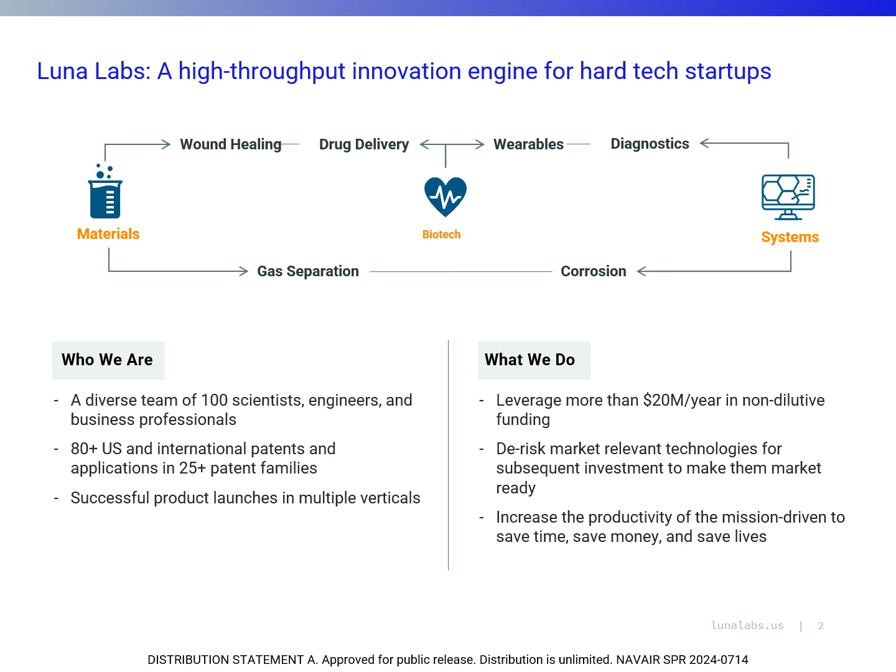Headquartered in Virginia, Luna Labs is a product development company working with industry and key government agencies to solve critical problems. With small business agility and large business capabilities, the company accelerates transformative solutions from concept to product launch for defense and healthcare markets.

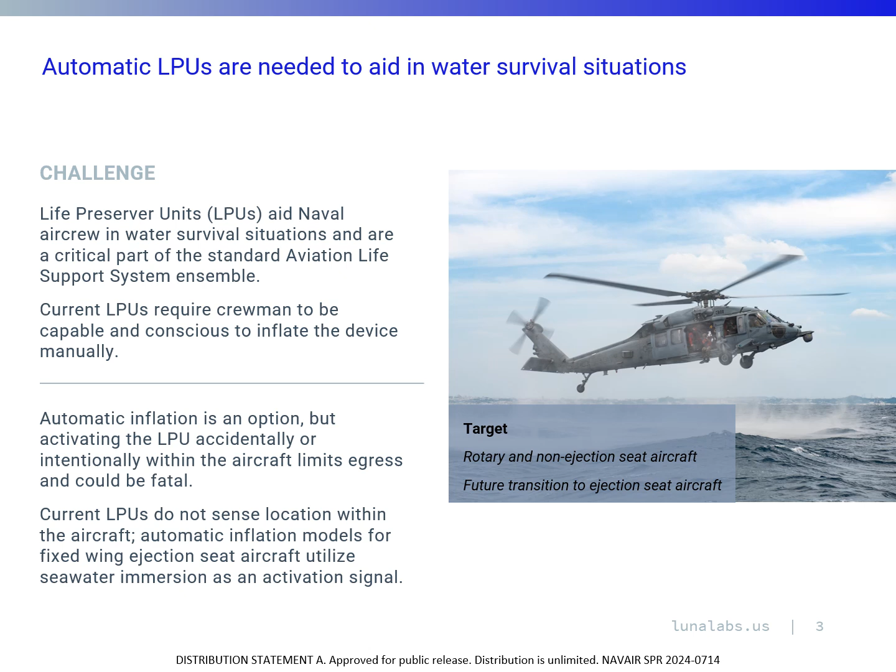Life Preserver Units, or LPUs, are critical life-saving equipment for all military personnel working near or above open water. Current LPUs typically require manual inflation by a capable and conscious crewman. Automatic inflation does exist for other applications, but for the rotary and non-ejection seat aviator, automatic inflation poses significant additional risk. This is because inflation of an LPU while a crewman is still in the aircraft would make it extremely difficult to egress. Current automatic LPUs do not consider egress status or crewman position, and are therefore not sufficient for rotary and non-ejection seat environments.

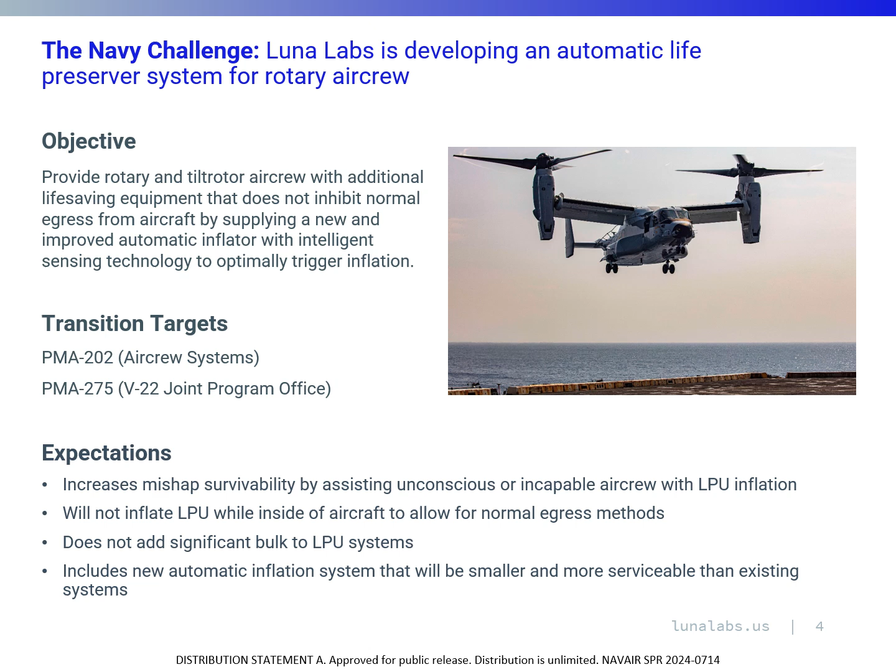Luna Labs is producing an automatically inflating LPU suitable for rotary environments. This life-saving equipment would provide additional safety to aircrew while limiting additional risk by sensing egress status prior to inflation. We are working primarily with PMA 202 and PMA 275, with a focus on the V-22 platform as a first adopter. By providing the warfighter with this capability, Luna Labs expects the Navy to be able to increase mishap survivability without adding significant burden to either the aircraft or the aircrew.

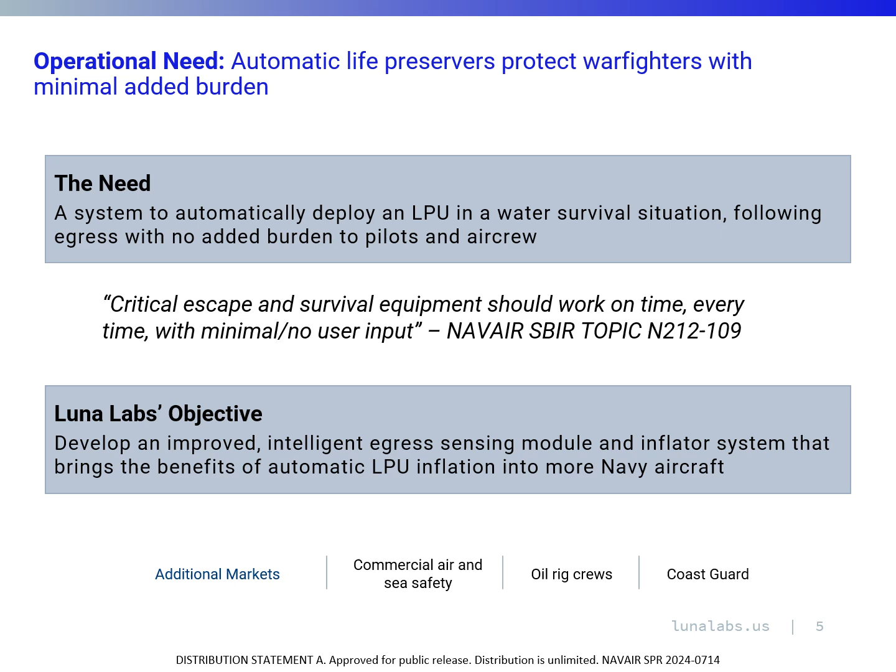To quote the SBIR solicitation, "Critical escape and survival equipment should work on time, every time, with minimal or no user input." Luna Labs is striving to deliver an improved system that will both expand current life-saving capabilities as well as seamlessly integrate with existing Navy equipment, workflows, and trainings. Luna Labs is accomplishing these goals by designing and producing a next-generation automatic inflator with intelligent sensing capabilities. This inflator will be compatible with existing Halkey-Roberts manifolds, which will allow for simple integration and retrofitting of existing LPUs.

This system will be smaller, lighter, and more affordable than existing automatic inflation devices used in ejection seat aircraft. Additionally, this device maintains all manual inflation methods and will not interfere with normal, non-automatic inflation. The SAINTS device will be able to be rearmed after a successful inflation to allow for the reuse of the system with very few consumable components. These consumables will all be commercial off-the-shelf parts, which will reduce procurement and maintenance burden for the Navy.

Additionally, the manual pull force required, which has at times proved difficult to activate in chaotic survival environments, can be reduced with this system. This improvement allows for an easy and omnidirectional pull to allow for disoriented or injured crewmen to actuate. Luna Labs can set this force as low as 5 pounds or as high as 20, depending on application and deployment needs.

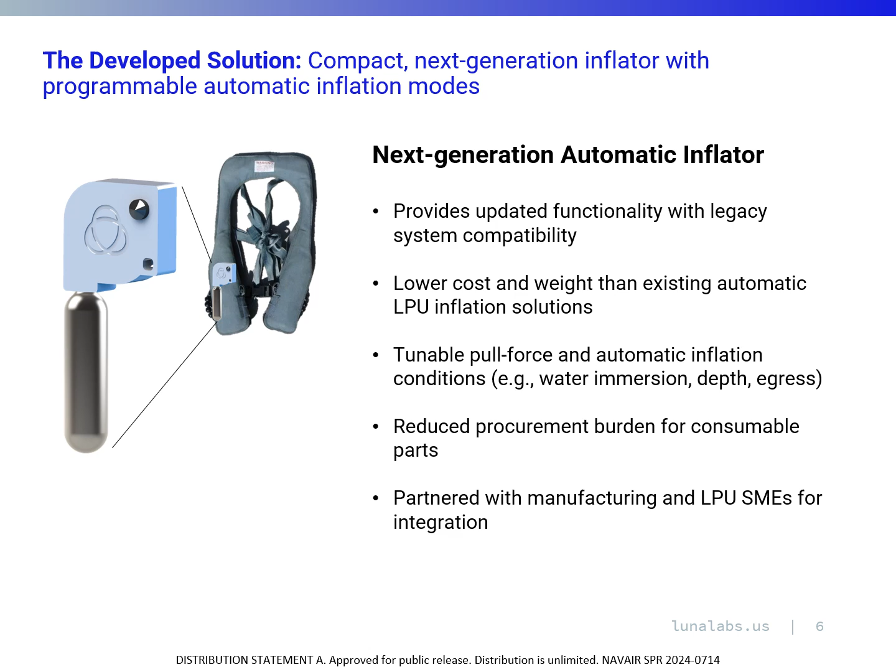SAINTS intelligent egress sensing takes advantage of ultrasonic technology to establish communication between the aircraft and the automatic inflator. This signal is established after both the aircraft and the inflator sense total immersion in water. After successful egress, the signal strength decreases as the aircrew moves away from the aircraft and beyond the egress envelope. The distance of this envelope can be tuned to ensure aircrew have fully egressed and reduce the possibility that crew could have encountered a snag hazard or are still tethered to the aircraft. Multiple receivers and transmitters are used to increase system redundancy and prevent unintended inflations.

The LPU-mounted inflator is similar in size to existing automatic inflation options, and the aircraft-mounted portion of the system is battery-powered and able to be attached with no drilling or alteration of the aircraft. It does not need to integrate or use power from any existing aircraft systems.

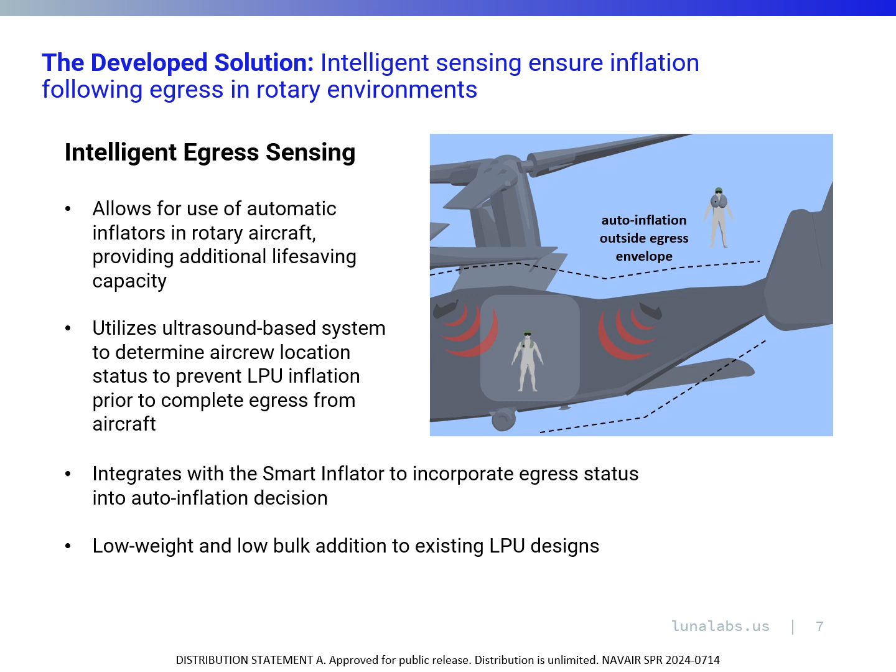This project started in 2022 as a Phase 1 SBIR. Since then, the team has proven feasibility of the ultrasonic sensing technology in both a laboratory setting as well as in a real underwater environment. In a 70-foot steel tank, we submerged our system underwater to test in various depth conditions, showing that even under the worst possible conditions, SAINTS will still operate as intended.

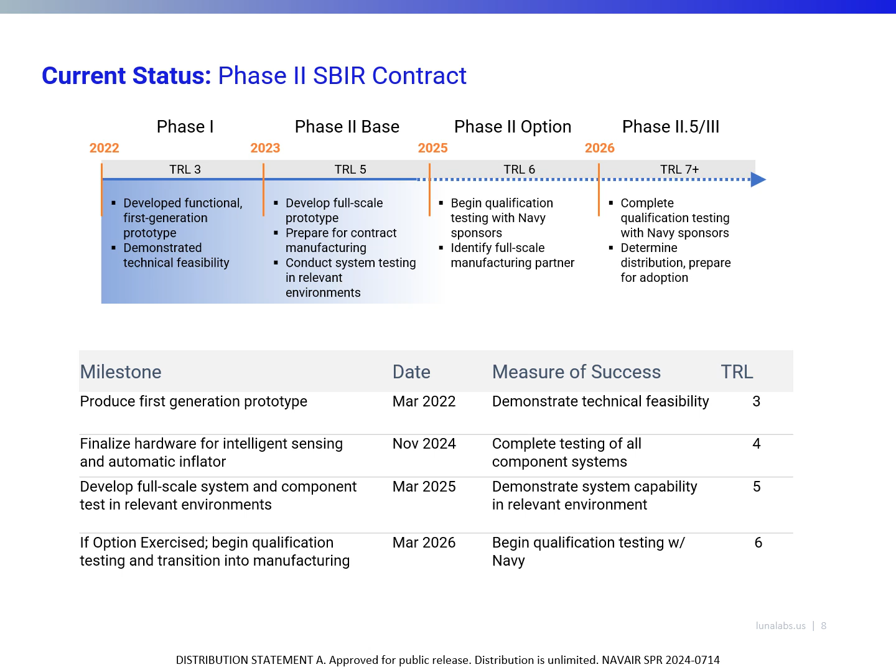At the end of this SBIR Phase 2 effort, the team will have a functional ultrasonic sensing solution, as well as a new and improved automatic LPU inflator platform. This automatic inflator can be used with or without the egress sensing component, which would be valuable for non-rotary applications where additional level of decision-making is not necessary.

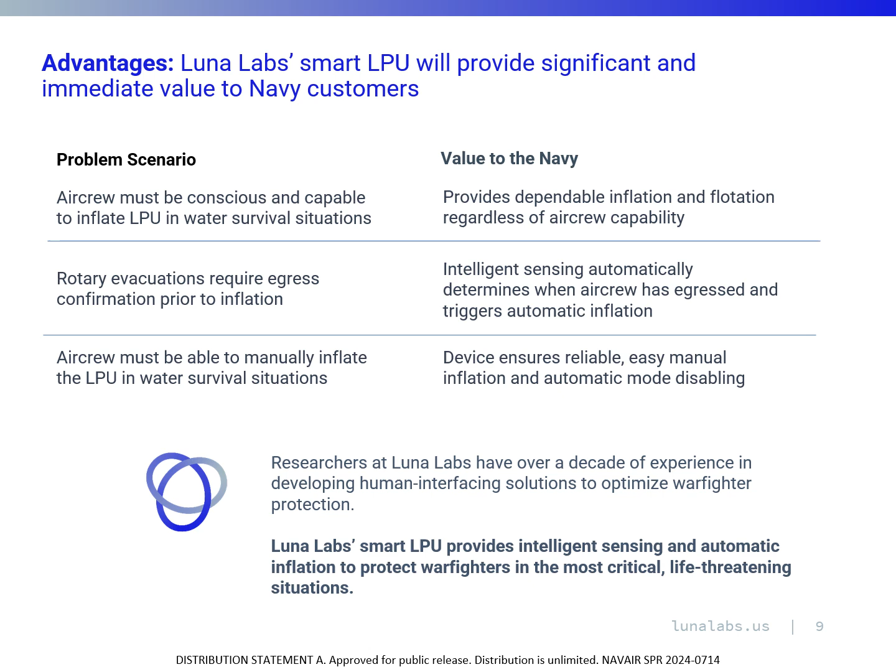Luna Labs' Smart Automatic LPU Inflator will provide immediate and significant value to Navy customers. With low added burden for maintainers, users, and procurement, the Luna Labs automatic inflator is able to increase life-saving capabilities in the most critical situations. Not only does this system increase capability with very little added risk, it does so in an easy-to-integrate package that can be retrofit into existing LPUs. This system will additionally enhance already existing manual inflation methods and lead to a better, lighter, and more compact LPU inflator for many applications.

A major hurdle that exists for the eventual acceptance, adoption, and field use of this system is qualification testing and validation. Luna Labs will demonstrate system efficacy in relevant environments during development efforts, but the true qualification testing and integration by the Navy will need to occur prior to system adoption.

Luna Labs is currently partnered with an existing military soft goods manufacturer for pilot-scale manufacturing and LPU integration services. As we work towards this pilot-scale system, we need transition advocates that can both serve as end users and provide valuable feedback to guide our final design choices, as well as partners to help with qualification testing and approval of the final system.

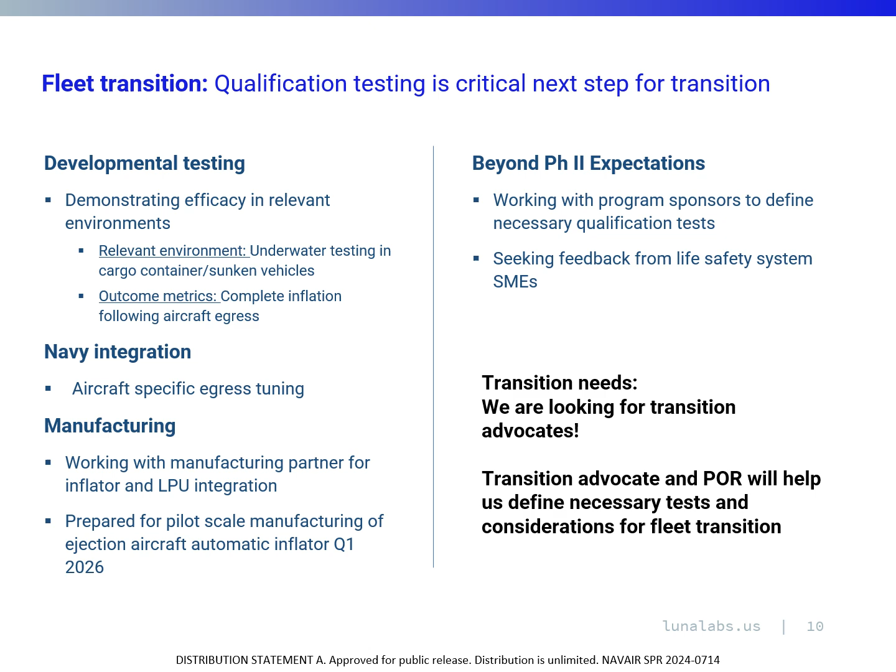In addition to Navy rotary and non-ejection seat aircraft, this system offers significant value to other markets. Specifically, the system without the intelligent egress detection will serve as a next-generation automatic inflator for all platforms and situations in which egress is not required prior to LPU inflation. As we approach the end of the Phase 2 effort, Luna Labs is developing market reports, performing customer outreach, and determining additional markets to pursue commercialization of this system in several avenues.

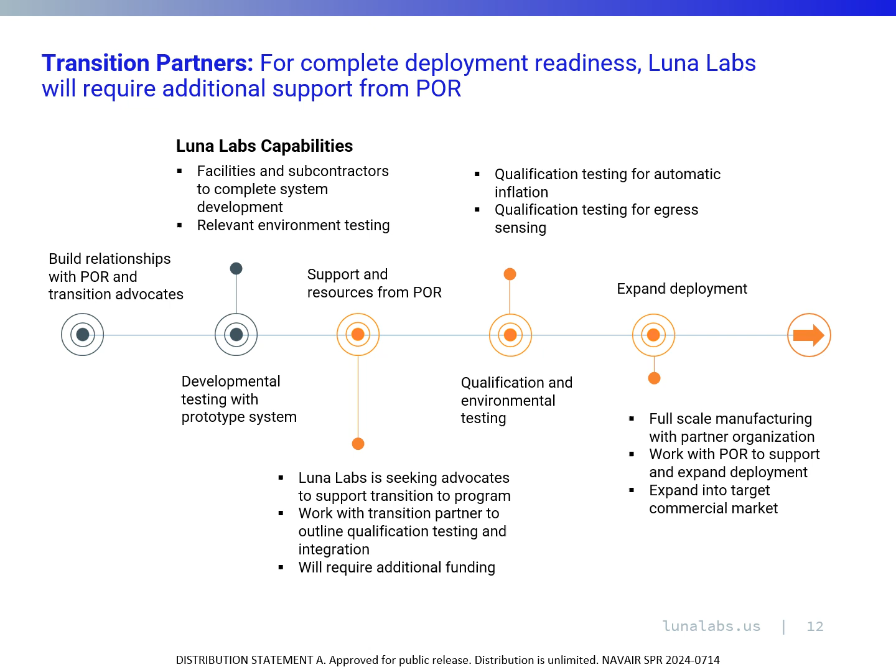In addition to DoD markets, there are also considerable civilian market segments that employ automatic LPUs, from recreational water sports to commercial offshore oil and gas platforms. As we approach the end of this development, we need support from transition partners and a program of record to define qualification testing and integration and support expanded deployment across different military organizations.